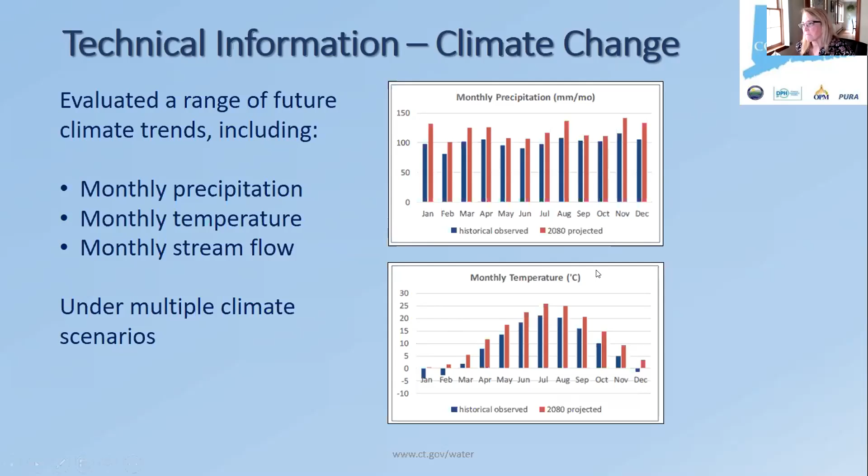So what did we learn? Jack talked about the plan and the basic tenets of the plan being balance. We had a very good group and subgroups and subcommittees talking about how to come to consensus, what we are going to work on and what the top items are, because there are so many things that need to be prioritized. There were hundreds of different ideas. So how do we boil all that up into something that we could talk to all of you about? What are the top items?

Obviously, it needs to be scientifically based. We have this process from the 80s. And Marianne, you were in Connecticut, I think, during this time when we had these registered diversions in 1981 and 82, and we still have them. So some are obsolete and need to be looked at more carefully. And I'll skip through this because we could talk all day.

The appropriate non-potable uses of Class B water, and we don't do this a lot. Some of our traditional ways in Connecticut, and we are rooted in our traditions for sure, may have to change. And obviously, as Jack mentioned, protecting our drinking water supply watersheds and developing outreach and education is so critical and important. Let's go to the next slide.

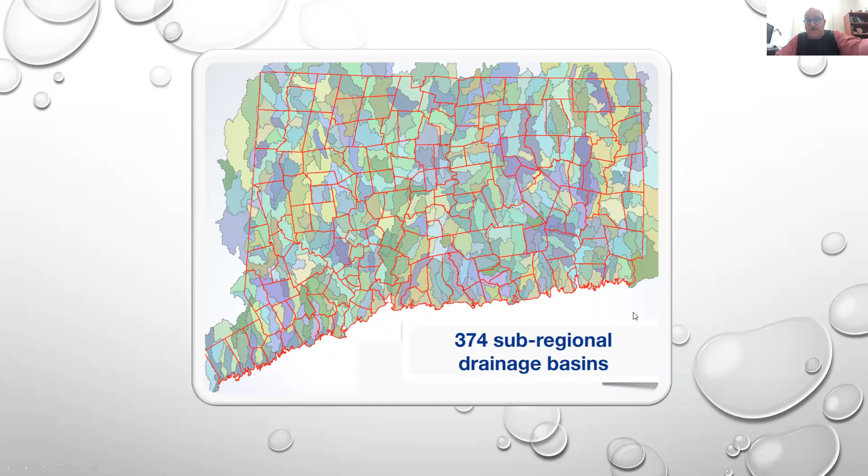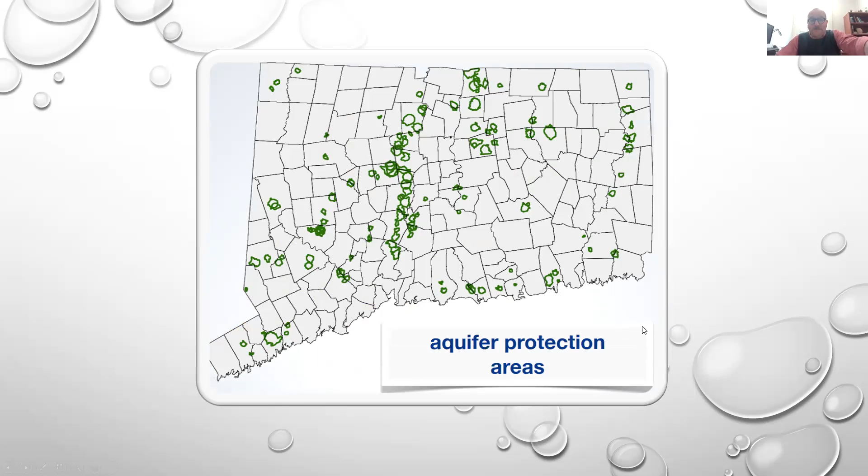We're divided into several major watersheds, which is a matter of actual geography rather than political distinctions. Those 8 basins are further subdivided into sub-regional drainage basins. We have 5 conservation districts. It used to be 8. That changed about a decade ago. It's now just 5. Lots of little aquifer protection areas and all kinds of local regulation that goes along with that, changing from town to town. Again, we sliced and diced, not counties, but councils of government. It used to be, I believe, 15. We're down to, I don't remember now, 9 councils of government.

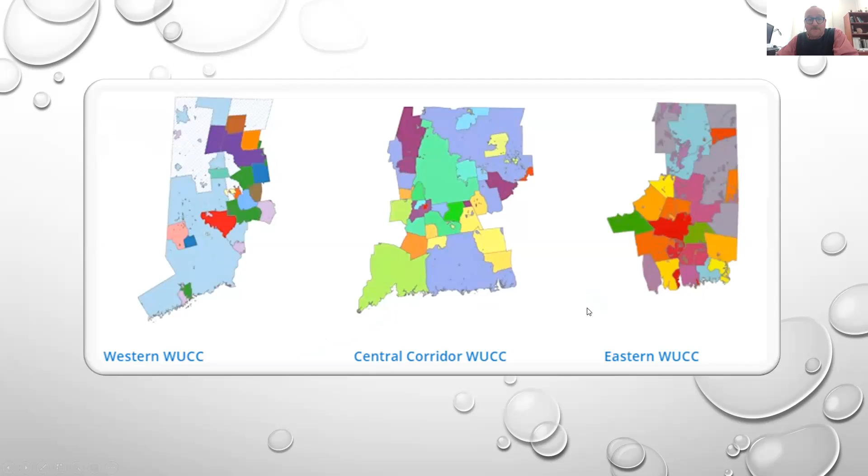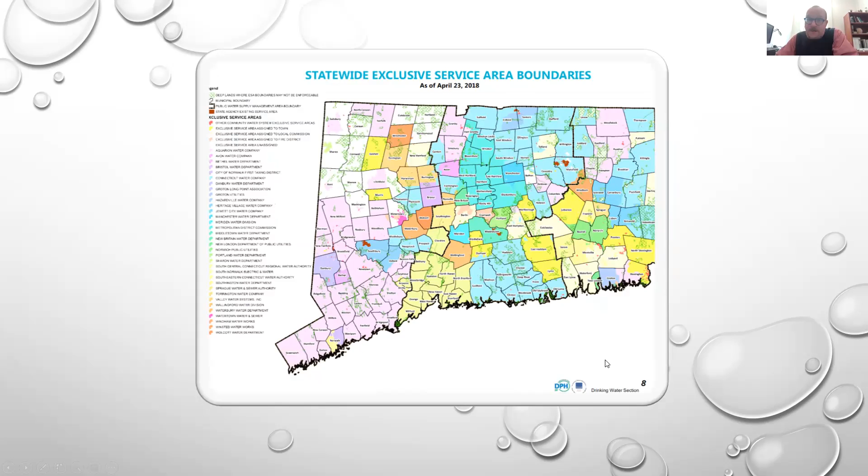And those areas are further divided. DEP has 11 conservation officer areas. So if you're looking at conservation projects, again, where does your town fit and how does it get sliced and diced? And then while doing the water plan, we divided the state into 3 water planning council regions that really don't match up with any of the prior geographies. And then in the water plan itself, you have exclusive service areas. So your town might belong to a water service provider that is completely different from the one in the next town over, who is also part of your council of governments or your conservation district or your watershed. These things can be very different.

And so from a local planning perspective, if you're starting out with these questions, you ask yourself, who do I coordinate with? Whose job is planning for water? I come from Northeast Connecticut, a lot of small towns that don't have public water lines. They don't have Connecticut Water or Aquarion running their water systems. And further, a lot of these smaller towns may not even have a very robust public works staff, or a very robust planning and zoning and conservation staff. So the answer could be very different from town to town: who's in charge of this, who do you coordinate with, and really whose responsibility is planning for water at the fundamental level.

And I would like to note that John Filchak from NECOG provided a lot of those maps. And what's interesting is he has a whole presentation called The State Divided, where he has somewhere around 150 different maps of how the state sort of separates itself in terms of different overlapping responsibilities and jurisdictions.

And the ones I showed you are really just the big picture government and conservation ones. It's really unbelievable how fractured we are in terms of the planning efforts that we undertake in the state. So again, the question for a local planner is how do we get our arms around this?

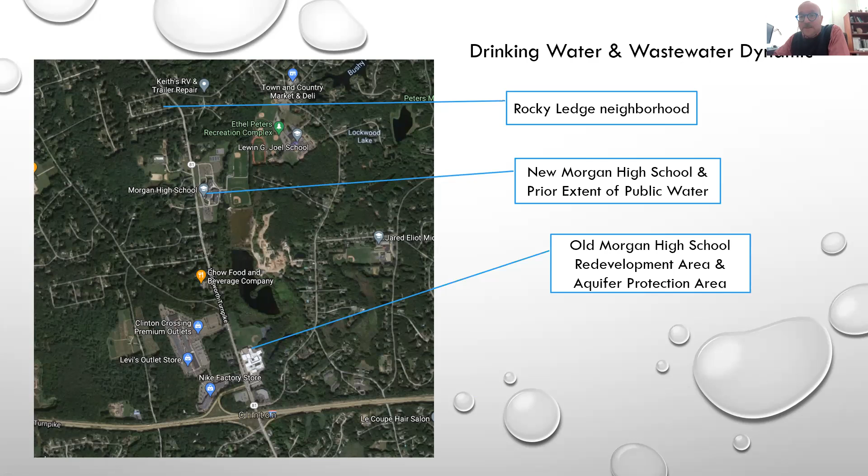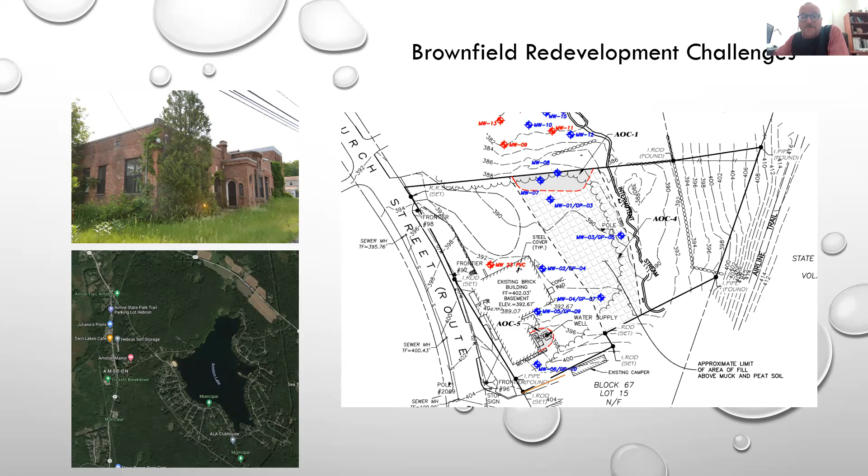And so what we are hoping to do is, there is a public water supply over by Amston Lake on the Hebron Lebanon line, and extend that water line in order to serve this redevelopment effort. But that becomes a financial challenge because the town can't really pay for it out of pocket. The developer can't foot the additional $500,000 bill, and the water service provider is reluctant to extend lines just for one new user. And so this is a challenge. This is a planning challenge that we are struggling through. So there are lots of examples of that.

And I guess I will leave that there, and happy to answer questions at the end, and looking forward to the rest of this presentation. Sorry, I blathered on a bit, Marianne. No, it's all right. We're just trying to make up a little bit of time because we got started late. So thank you very much. Great introductory presentation, John.

So our next speaker is Aaron Budris, and while he pulls up his presentation, I will go ahead and introduce him. He's a senior regional planner at the Naugatuck Valley Council of Governments, where he focuses on environmental planning issues. He represents the COG on the Western Connecticut Water Utility Coordinating Committee, the WUCC, and is the Connecticut Councils of Government representative on the Connecticut Water Planning Council Advisory Group. Aaron earned a BA in anthropology and an MS in geography from Central Connecticut State University, and he'll talk with us about planning for water sustainability.

Thank you, Marianne. So I'm just trying to arrange my desktop here so that I can control things. Okay.

So like Marianne said, I work for the Naugatuck Valley Council of Governments. We're a 19 municipality region in West Central Connecticut. Our board consists of the chief elected officials of our 19 members, and we're one of 9 COGs in the state, like John said. We focus heavily on transportation planning, but we also play a role in land use planning. We prepare a regional plan of conservation and development, which is an advisory document that provides policy recommendations for the future development of the region. We focus mainly in that document on issues that transcend municipal boundaries, like water supply.

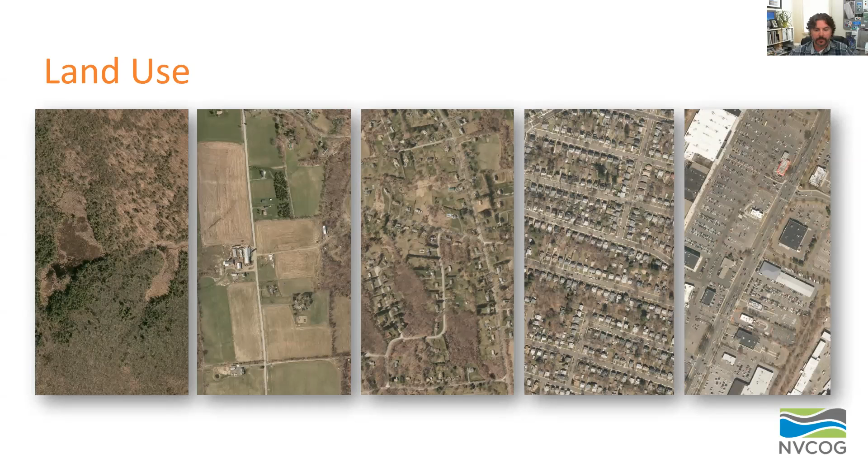So how can you protect water quality? One way is preventing development by legally protecting watershed land. And there's several state and federal programs to help municipalities, water companies, and nonprofits do that. The one I'm most familiar with is DEEP's Open Space and Watershed Land Acquisition Program.

Just in the past few years in our region, the program's funded watershed acquisition in Watertown, Shelton, and Bristol. And I'm hoping that a joint application that was submitted this year by Regional Water Authority and the town of Cheshire will also be awarded.

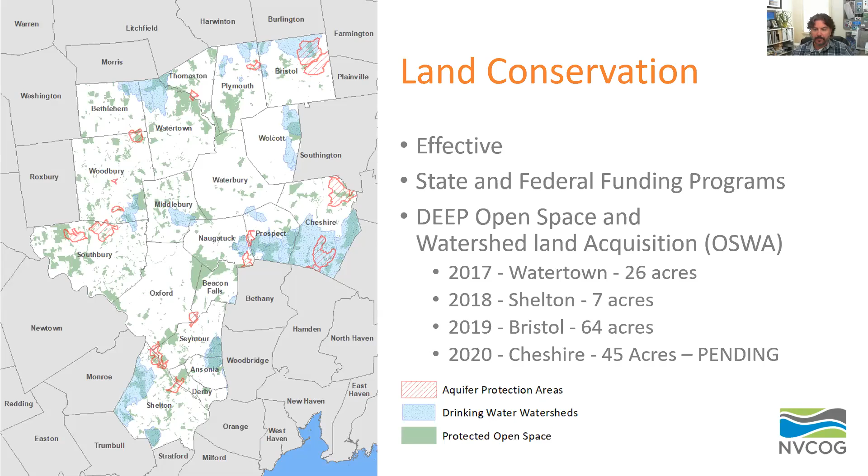But conservation is not always feasible, especially in larger watersheds. And that's where regulating land use can also help protect water resources. So zoning can be used to control the type of development or restrict more impactful uses in sensitive areas. Subdivision regulations and site design standards can ensure that septic systems are properly designed and sited or require proper buffers around water courses. Sediment and erosion control measures can limit runoff from agricultural or construction sites.

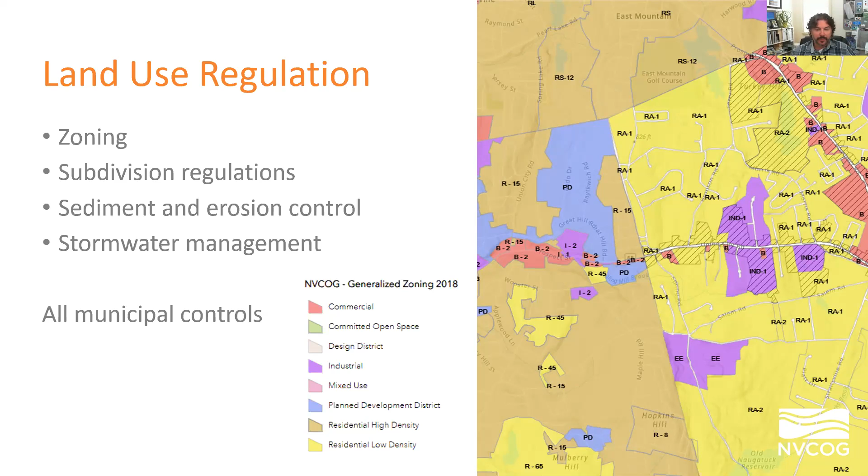Just as an example, the Waterbury water system, which is the largest system in our region, the city operates a series of surface water reservoirs with watersheds stretching across 8 municipalities. And there's currently no local regulations or zoning initiatives for the protection of those sources. But regulating land use in those watersheds could be difficult.

First of all, because there's so many jurisdictions that you would have to deal with, but also many of the watershed communities are far removed from the benefits that come with maintaining that water quality. And there's conflicting needs, mainly between the economic development of those communities and source protection through limiting that development.

And I'm not implying that there's an immediate threat to the Waterbury water system, but the department does monitor development and conducts annual inspections. And the majority of those watersheds are pretty rural. But even though they are rural, there's going to continue to be increasing development pressure. And in order to plan for long-term sustainability of the water supply, that development does have to be considered.

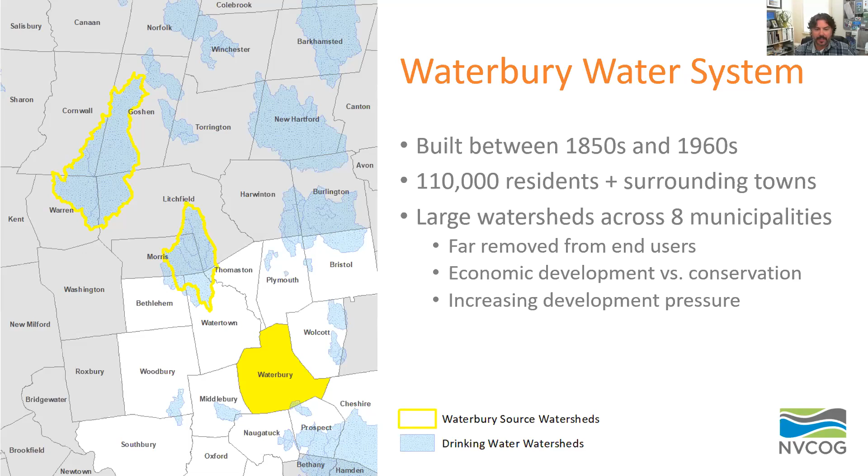So the Department of Public Health has promoted a planning process called the Drinking Water Quality Management Process as a way to plan for water across multiple jurisdictional boundaries. It's a really intensive and comprehensive planning process that brings together diverse stakeholders, from suppliers and consumers to business owners, developers, landowners. And the goal, I think, is to really find a balance between watershed protection and community needs, and with a goal of allowing and planning for responsible economic development while still protecting water supply.

These plans prioritize subwatersheds for protection and make specific recommendations for proactive watershed management, like changes to local and regional POCDs or local policies that support watershed health. And today, I think there's only been one regional scale plan completed in the southeast part of the state for Groton Utilities. But even though this process hasn't seemed to get much traction statewide, it really seems like a very good way to address the complex needs around planning for water quality in larger, more complex water systems.

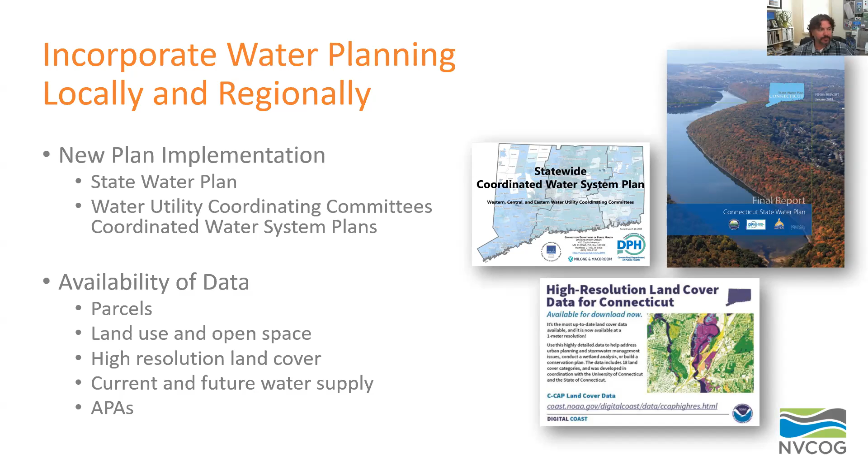Okay, just want to switch gears here for a little bit and talk about a positive outcome for sustainable water supply that recently happened in our region. So the Heritage Village Water Company operates a well field in Southbury adjacent to the Pomperaug River, and it provides water to customers in Oxford, Southbury, and Middlebury. Groundwater withdrawals from that well field have been shown to directly impact the flows of the Pomperaug River, which has a history of very low flows in the summer that severely stress fish populations.

In 2015, Southbury attempted to develop a town-wide water use restriction ordinance with the hope that it could be used to reduce water demand during periods of low flow. And that effort was ultimately not successful, and the ordinance was never passed. Looking back, I think it was sort of a political decision, but I think there was reluctance to impose restrictions on private well owners in the basin, and the fact that surrounding municipalities were not interested in taking the lead or following that lead was also an issue.

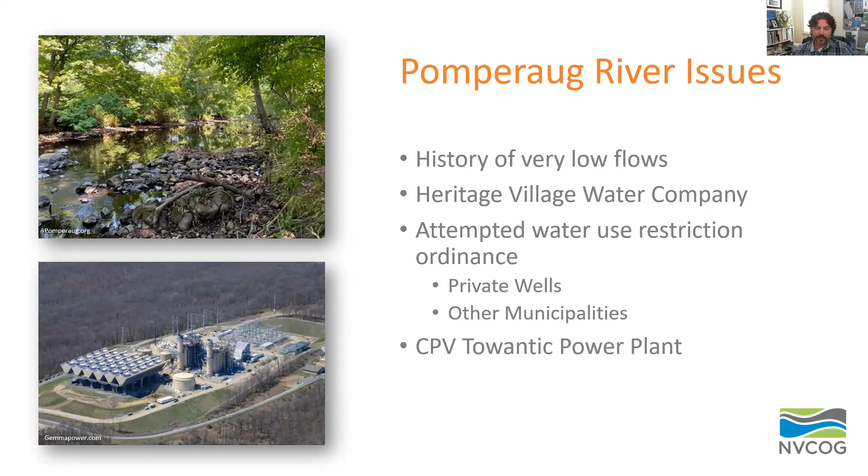And to exacerbate the issue, in 2015, the Towantic power plant, which is a very large gas and oil fired facility, was sited in Oxford that would be served by Heritage Water and would require substantial additional water withdrawals. So to help preserve flows in the Pomperaug, Heritage Village Water Company and Connecticut Water Company worked with the Pomperaug River Watershed Coalition and the town of Southbury to develop a low flow operations plan. And what it basically entails is voluntary water use restrictions that are enacted at river flow trigger levels that are directly related to wildlife stress.

And all Heritage Village Water Company customers and private well owners as well get this notice and are asked to reduce use. And Connecticut Water Company also agreed to offset Towantic's daily water use during the summer using an interconnection with Connecticut Water Company's central system in Middlebury. So that could really go a long way to helping maintain river flow. And I think these solutions are really good examples of collaboration between diverse stakeholders that resulted in a more sustainable water supply by helping protect that in-stream habitat.

And I think it shows what John was talking about, the importance of collaboration between watershed organizations and water companies and really all different stakeholders involved with water supply. So Mary and I went pretty quick there.

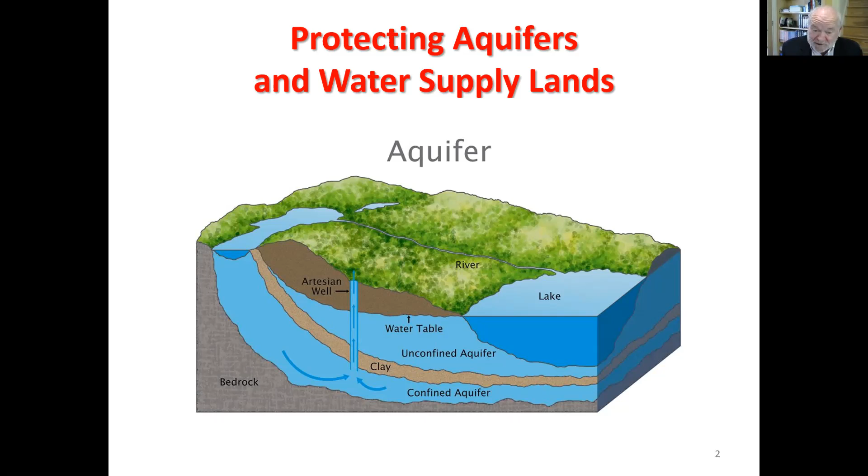The takeaway from John and Aaron is that we need to orchestrate techniques. I'm not just talking about development rights transfer. We need to think about everything else that we do, including infrastructure expenditures. Planners, and I'm a planner as well as a lawyer, we talk about when you extend water and sewer, you're just begging for development. You will get development. Trust me. I'll come and I'll represent somebody and we'll rezone the property and we'll develop it if you put water and sewer there. So I can't overemphasize the importance of capital improvement programming.

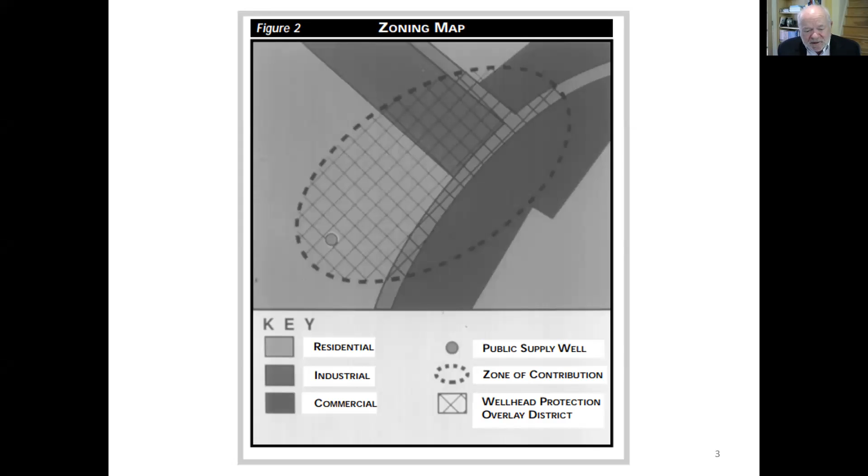But here's a slide, and I want you to sort of get a brain reset here to think about leaving the underlying zoning, but consider overlays where you have a resource, whether it's a surface or subsurface resource or a watershed area. And we can put, as shown on this slide here, an overlay for protecting that. So now let's think about slicing and dicing land in the context of the Fifth Amendment. The Fifth Amendment of the US Constitution, here's my copy from my office, you can read along. The Fifth Amendment allows government to take property when they pay just compensation.

And we have two types of takings. We have eminent domain, which is a direct taking, and that's allowed by the Fifth Amendment if you pay just compensation. The notorious Kelo case is one example. But we also have indirect takings or inverse condemnation or regulatory takings, all the same thing. And when you start over-regulating water resource lands, you, government, risk getting sued for a taking. And that's what we want to stop. We need to protect private property owners.

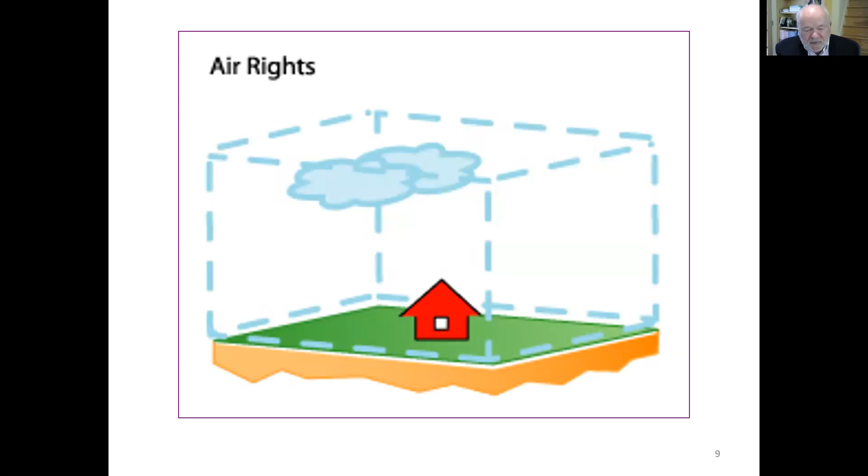So let's think for a moment, again, reset, reboot your thinking about property. Here's how property is really divided up. You just don't own a piece of land. First of all, you have property in two dimensions, the surface and the subsurface. And then we have air rights on top of that. The Grand Central Terminal case in New York City was an air rights case. We have consolidated holdings, when we talk about the relevant parcel in takings, and we're not going to go there today, where properties are operated by a single entity, maybe in different ownerships. And we have non-contiguous holdings and later acquired holdings.

I'm giving Marianne a run for her money. She was complaining, I got 33 slides. She says, Dwight, you can't do it. You just keep your finger on that advance button, Marianne, all right?

So, transfer development rights, that's what we're here to talk about. I've written and studied extensively on this since I was a second-year law student in 1976 and 77, and I published a piece in the North Carolina Law Review the next year called Making TDR Work. It really started about 12 years before, in the mid-60s, with John Costonis, a law professor, talking about preserving historic buildings.

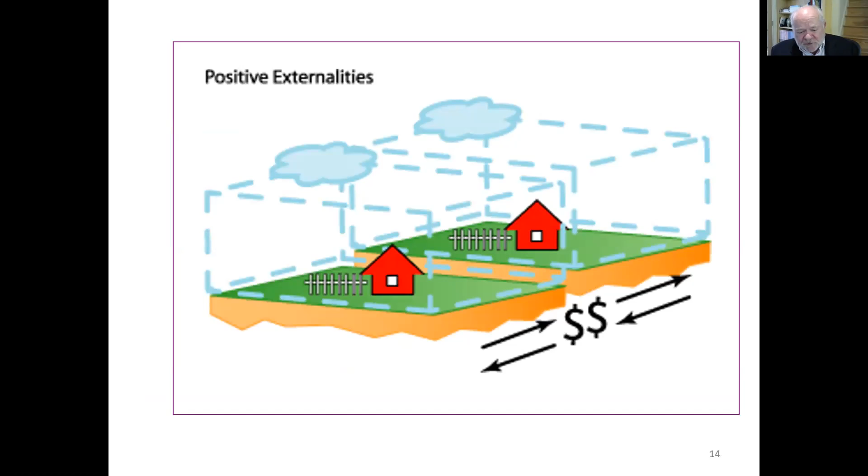So now we're back at transfer development rights, and here are the principal elements of it. You have a sending site, which in our case is a water resources area, surface or subsurface supply, and you want to prohibit development or greatly restrict development. Maybe allow only primitive camping, for example. But you've got to pay for that because you're taking private property rights away from people. So you put a restriction on a sending site. Then you have a receiving site where you can probably take some more density.

And you set up a scheme by which you can move the development rights from the property you want to protect to the one that is capable of carrying more development. The coin of the realm is a development right of some sort, and I'll give you an example from the Pine Barrens in New York in a minute.

And I think a key to this is having banks. Just like banks stabilize our currency, they can stabilize the value of development rights. And development rights programs that don't have a bank are very difficult to manage. So here's a couple examples from Boulder County of both receiving and sending sites.

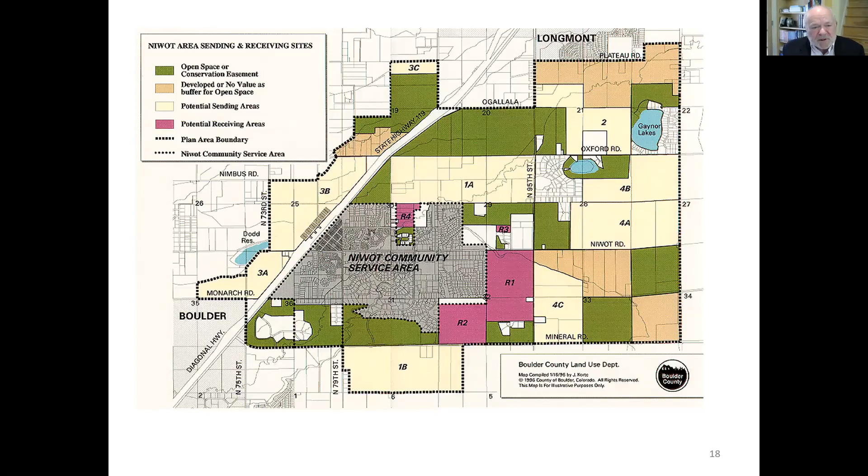All right, so let's give one more picture here of what happens. And this is sort of a takeoff on the Grand Central Terminal case. You've probably all been to Grand Central Terminal, famous case in 1978. Involving a prohibition on building a tower on top, and the development rights were able to be transferred to adjacent properties. And this graphic simply shows what could happen with Grand Central Terminal and why the US Supreme Court decided

it wasn't a taking. The three-part test that they set up dealing with diminution in value, investment-backed expectations, and the importance of the government's interest, found in this case all that 50 stories of air rights could be moved over. I'm moving it over here. I just moved it over. I'm back to another site. And that was part of the calculus that the US Supreme Court had in finding that the Penn Central Railroad Company had not had their property taken by over regulation.

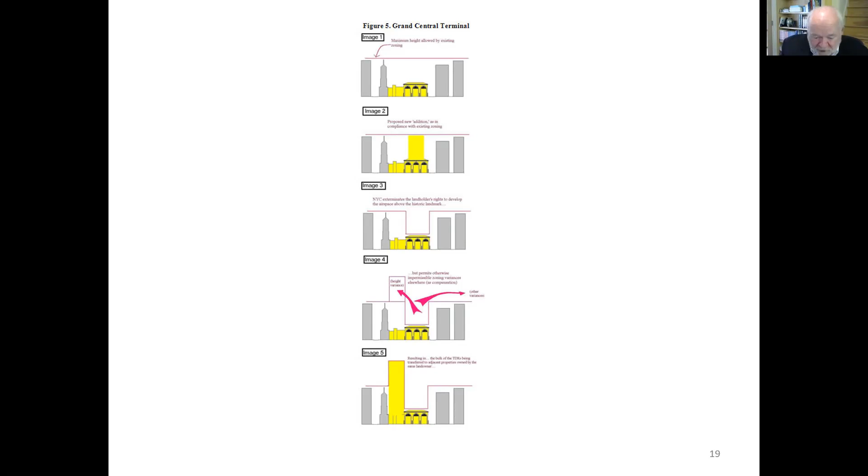Now here's an example of Pine Barrens in New York. Really the things I wrote about in 1976, 77, and 78 in making TDR work are surprisingly unchanged today. They're still difficult to make work, but in low density areas, for example, watershed lands, it can work, and it has worked in the Pine Barrens in New York.

And it's incentive based. So not only do you have to have a bank, I think, but you also have to have potentially some incentives, a density bonus on top of moving the development rights. And obviously you have to have sufficient demand for the receiving areas for private property owners to buy those rights. The institutional cost of these transfers is high because there are lawyers involved and there are documents.

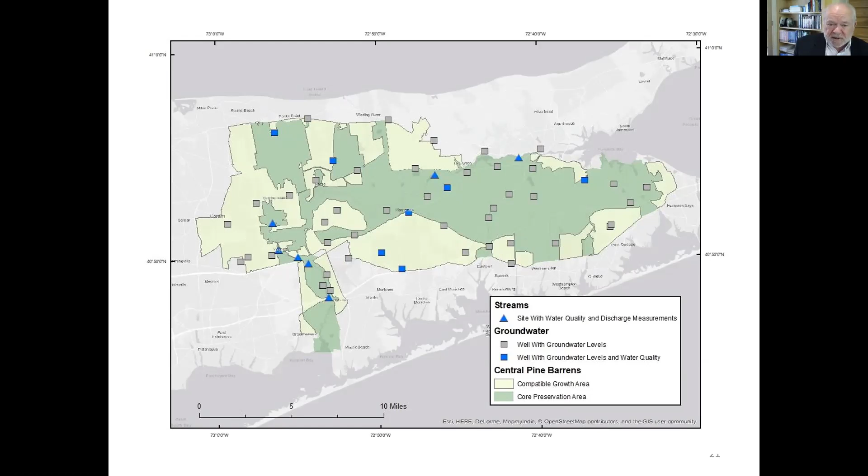So in New Jersey, they developed, and you can do it anywhere, you can do it in Connecticut, transfer development credits, where a single property owner owns both the site to be preserved and the site to be developed, and that wipes out the transfer problem. But here you have a bank and you have incentives, and it includes sanitary credits. You get one credit for 300 gallons of sewage discharge, and that allows people elsewhere to develop at a higher level. So let's go on here, Marianne.

And they can be multi-jurisdictional. I did one for the Cape Cod Commission that allowed transfers throughout Barnstable County on the Cape. They don't work when there isn't a market. They do work in low density situations. So let's go on to why does TDR prevent takings? Because it allows a private property owner to capitalize on their development potential by selling those rights to somebody else. And it may be a requirement, as mentioned in the Suitum case before, you can bring a takings case.

Can a transfer development right be taken by the government? Well, it can, in the sense of overregulation, if there's no market for them. So what do we do if TDR is not working besides a bank and incentives? If that's not making it happen, what do we do, Marianne? We go on to the next slide. There we go.

And so here you can do the purchase of development rights. So if your transfer isn't working, you can always go buy it. I always say that to people when I'm representing a government. If you don't like what's happening, buy it. So you can go and you can actually use your eminent domain power to take development rights, but you could also negotiate a purchase. And we do this frequently in Connecticut in acquiring conservation easements.

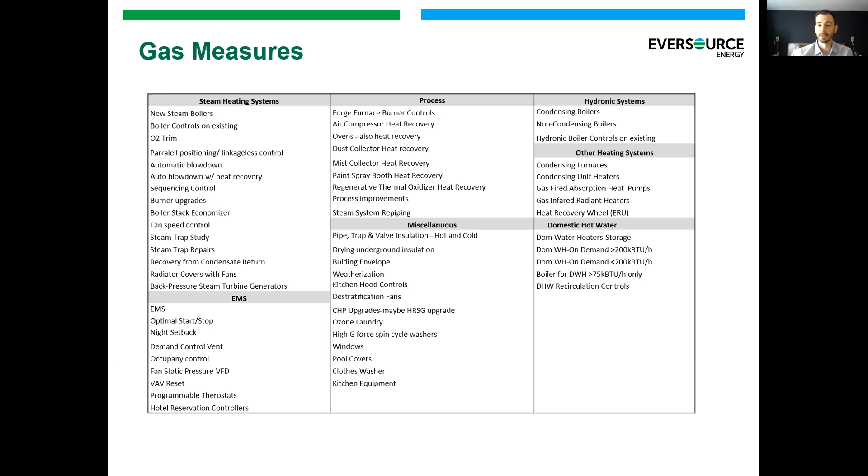So where do we start? What programs do we have to help you identify those projects? We've built some programs geared towards some of our smaller customers and municipalities. The first one is the Small Business Energy Advantage program, which is for electrical consumers that are 1 million annual kWh and less. And there's also another program we built called the Business Energy Advantage Program, which is for 5 million annual kWh and less.

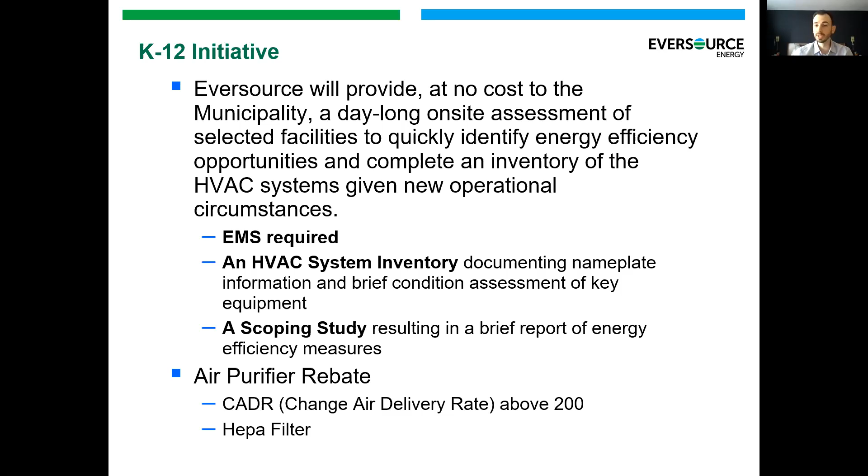So we've seen some people take advantage of that. I myself have one in my house, I have a couple. And as long as they meet certain clean air delivery rates and have a HEPA filter, we're providing rebates for some of those air purifiers. So please reach out if you haven't heard about that.

One of the other ones, the newest RFPs that we put out is for rooftop units. I don't want to run through all this too long, but basically what we're trying to do is influence the market to replace very old rooftop units. As long as they meet a minimum tonnage size, they potentially qualify. The way this is different than normal incentive programs is for a rooftop unit, you just get a rebate based on the ton and the efficiency ratio.

This is asking the customer and the contractor, what do you guys need to undertake those projects? What is the financial assistance that you need, and what are the energy savings at that site that we can assist you with? And basically you're telling us what you need instead of us giving a strict rebate, and you potentially win an award of that project. And that goes the same for a chiller RFP that we put out as well.

We're actually on the second round of this for chiller programs. So we're looking at larger 600 tons and above chiller plants. And it's basically the same process. We're looking to see how we can influence the market to get rid of old, inefficient chillers and understand what it takes financially for customers to do that.

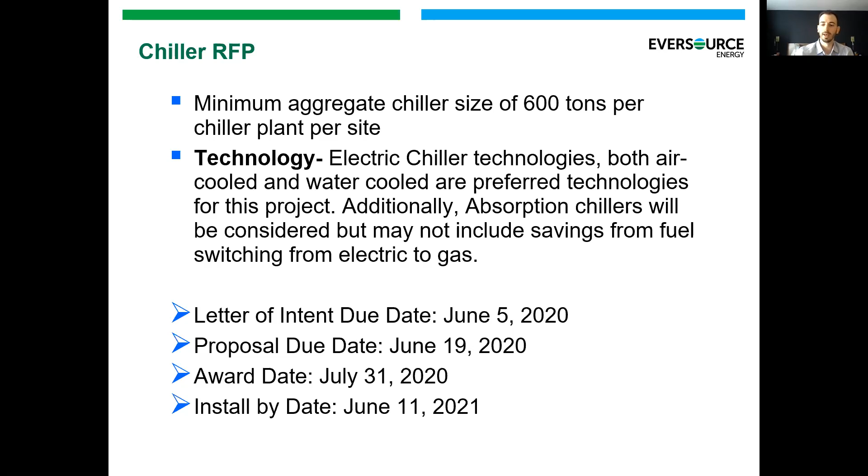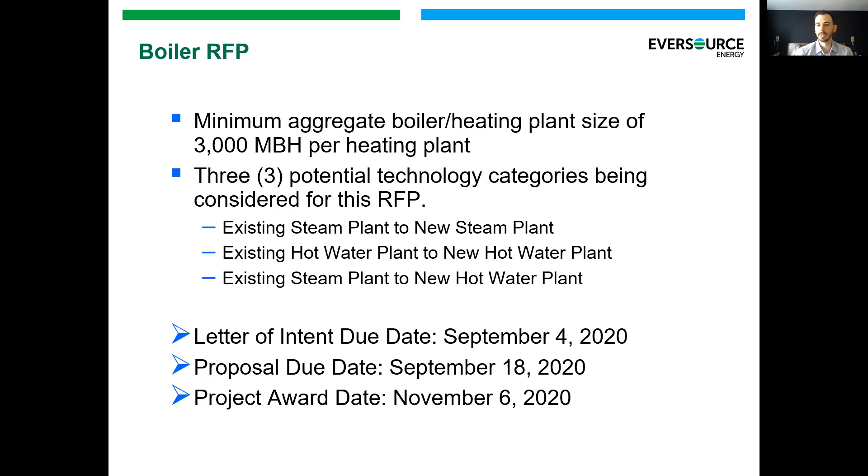And we did the same thing for boilers as well. It's one of the newer ones as well, put out this year. There's some deadlines on each one of these slides, and we'll get the slides to everybody at the end as well. But basically, we're trying to do the same thing for boilers. Understand, boilers are very large, capital-intensive projects, especially for these larger units. And what does it take out there to get these inefficient boilers replaced?

And I also want to touch on new construction. I'm not going to go into new construction of all the different ways that we have. What I would say for new construction is there's many paths you can take depending on where you are in the process. We would love to be involved as early as possible, 5 years before you guys are starting to plan these new buildings. We understand though that there's times when you've already started building and you need assistance. Try to get us involved as early as you possibly can.

There's incentives for design teams. There's incentives for rebates if you've already completed stuff. So please reach out as early as you possibly can. We need to have the chance to influence these projects. Just designing a project to code is not going to benefit anybody in the long run. We want to incentivize you to go to more efficient units, which are going to last for 20, 50 years on some of these systems. So you might as well do it now while you're building it, and we're going to incentivize you to do that.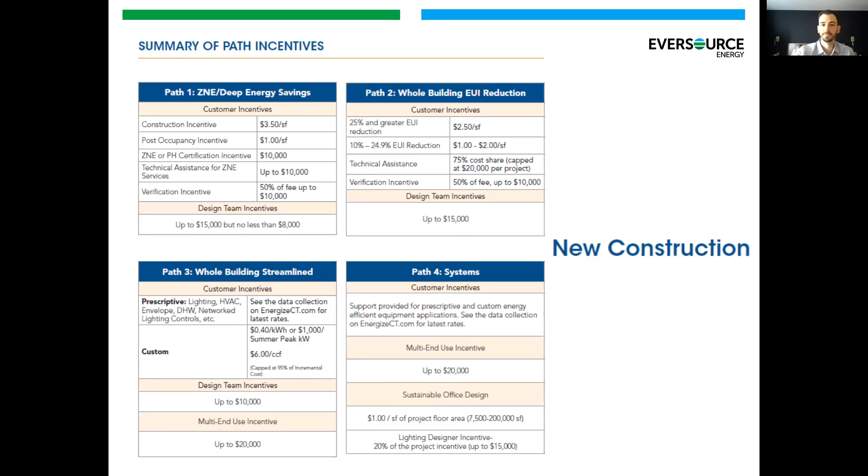And I touched on, if you finish a project, there's a process for rebates as well. Whether it's upstream that we've already discounted directly at distributors where you buy lighting products, hot water heating systems, to putting in for rebates afterwards if a project is completed. So even if you've done work already, there are certain measures that we do allow for rebate style afterwards. So if you completed something already in 2020, please reach out to us to see if it does qualify if you didn't have the opportunity to come to us for an initial letter of agreement before the project was completed.

And then, do you mind if I just jump in for a second? Because I know we're running short on time. I just wanted to plug something that I think is particularly important for this group. So beyond just our energy efficiency programs, the UI and Eversource, we really offer holistic and customized solutions that focus on integrating energy efficiency into your C&I day-to-day operations through strategic energy management and some other approaches to business sustainability. So this is really looking beyond just energy efficiency.

It's really important to us that when a customer is addressing the energy efficiency of their building or their facility, that it's really a good time for them to consider other sustainable opportunities. And that includes installing renewable energy technologies or reducing water consumption for an industrial process, just as an example. So while the utilities may not be able to provide all of the sustainable opportunities, our goal is really to connect our customers with the right resources that are available to help them address those opportunities when they're making energy efficient improvements.

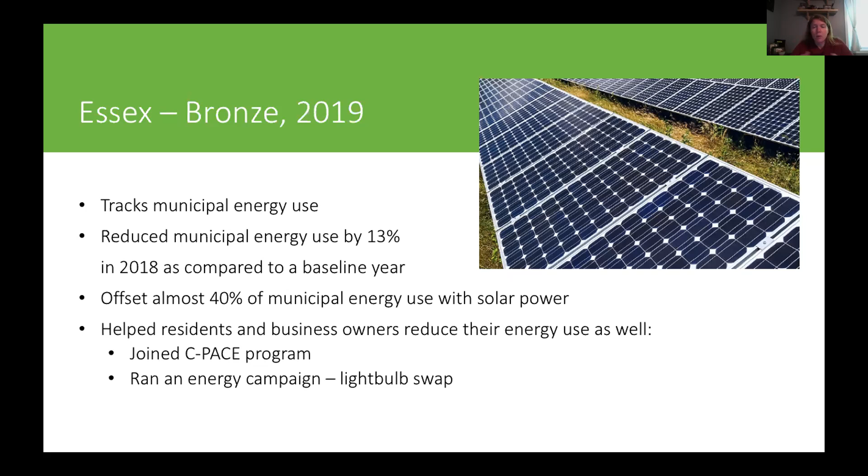So they're offsetting almost, they're just not quite there, I think it's 38%-ish of their municipal energy use with solar power. So really great work from Essex doing the foundations, understanding their energy use, reducing it as much as possible, covering the rest with renewables. And they're not just stopping at the town's energy consumption, they're also trying to help residents and business owners reduce their energy use as well. They've joined the CPACE program, which Justin covered, and they're also running energy campaigns in town, like light bulb swaps, so residents can reap some of those benefits of reducing their energy consumption.

Another town, Coventry, they were bronze in 2018 and moved up to silver in 2019. Again, foundational, tracking their energy use. They're also tracking their energy use at their wastewater treatment plant. They've got charging stations for electric vehicles on various town properties for people moving through or coming through Coventry to use. They're also adding EVs to their municipal fleet. So they're tackling that tough nut of transportation emissions and energy use.

They have an energy plan. They're working with Eversource to convert their streetlights. So more programs alignment that we're seeing with Eversource. So towns who are really taking advantage of some of these resources are saving a lot of money and also cutting down their greenhouse gas emissions.

And they've got an energy conservation and resource policy on the books to continually track energy use and continue to identify ways to save across town departments. So it's practice, it's written down, it's how they want to continue to move forward. So they won't be resting on their laurels in Coventry. They're going to keep advancing the needle. And just like in Essex, they're producing municipal energy from solar, more than 30%. They've got 11 projects in town, generating almost 500,000 kilowatt hours in 2018. So really huge achievements in Coventry.

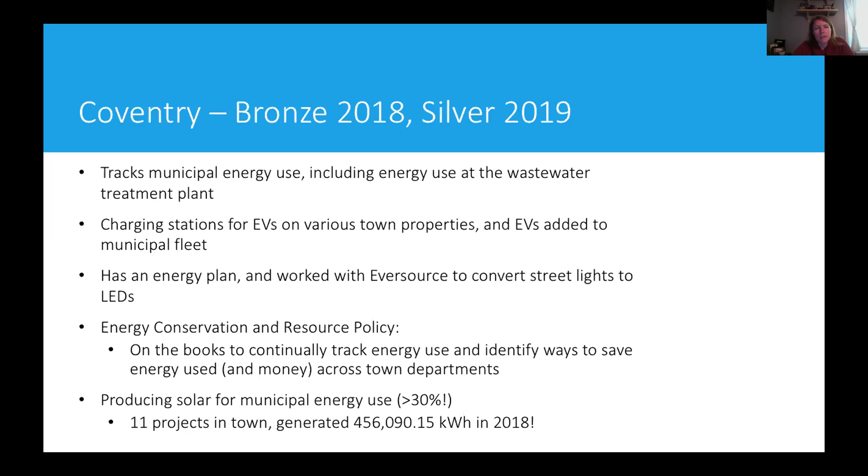And the last town I want to highlight is Middletown. Went from bronze certification in 2018 to silver. So great job to Middletown. They're doing, it seems like, everything. They're tracking their municipal energy use. When they build buildings, they're building buildings that are energy efficient. So they've got a LEED Silver Senior and Community Center, which I've been in. It is a very happy feeling building. You go in there, it just feels healthy. And there's art all over the walls, pretty cool.

They have a municipal energy plan. They're participating in CPACE. They have CPACE projects on the ground. They've got EV charging available to the public. So they've got the whole suite. They've purchased their streetlights and they've installed LEDs. So another huge cost savings for the town.

And one thing that's unique, they ran a Solar for All campaign in 2019, working with the Connecticut Green Bank and an organization called Posigen. Solar for All is a campaign that targets low to moderate income homeowners to deploy solar on their rooftops. That's often a segment of the population that's left out of solar deployment, though one that could definitely benefit from the cost savings associated with solar. So Posigen has a specific program for low to moderate income homeowners. Middletown went for it and ran the campaign to the benefit of their residents.

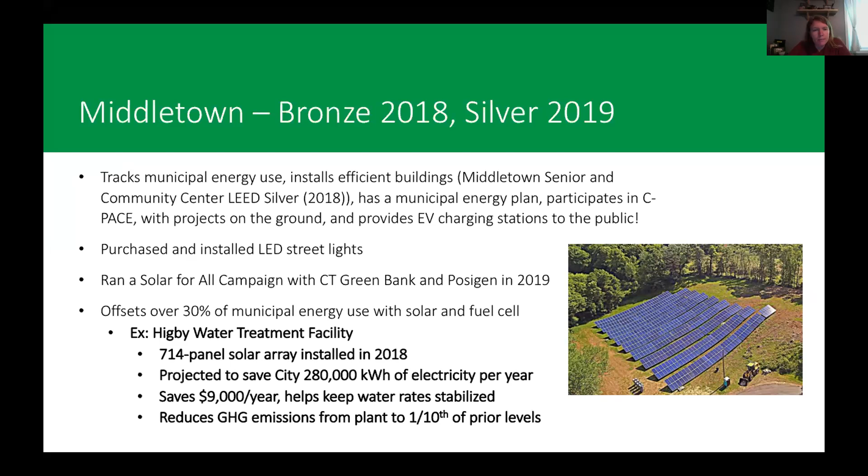And since this is a water event, I wanted to end with at least one water/electricity project. They are offsetting over 30% of their municipal energy use with solar power and a fuel cell. But one thing they've got that's really cool, adjacent to their water treatment facility, the Higby Water Treatment Facility, they have a 714 panel solar array, which was installed in 2018. This is projected to save the city 280,000 kilowatt hours of electricity per year, saving $9,000 per year, which is also helping the city keep water rates stabilized. And it also reduces greenhouse gas emissions. So really a huge win. Just great work that's happening in Middletown, Coventry, Essex, and across.